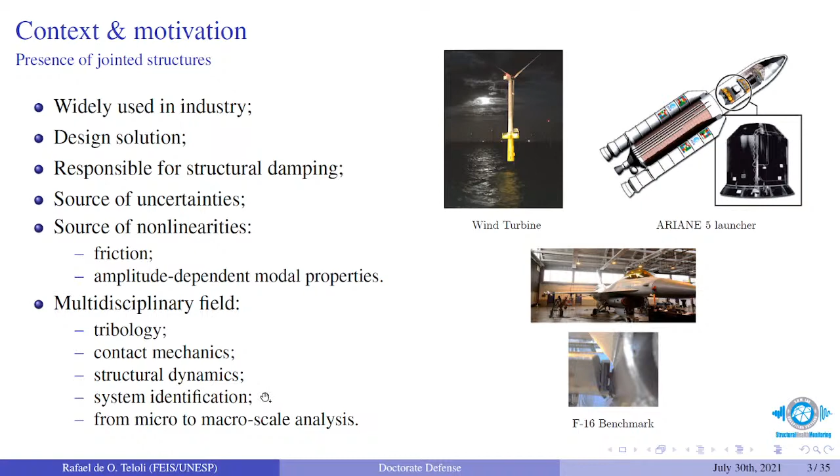The main purpose behind using joints is to connect parts. However, when these parts are subjected to sliding motion, frictional effects may appear. As we increase the amount of slip, the nonlinearities become more prominent, such that the modal properties of these systems are amplitude dependent. Jointed structures are part of a multidisciplinary field, involving aspects from tribology, contact mechanics, structural dynamics, system identification, and analysis from micro to macro scale.

In this work, our interest is in dealing with structures assembled by bolted joints, where we address the nonlinear behavior of such structures. We can divide our problem into four quadrants, ranging from local to global scale of analysis and also from modeling to experimental applications.

Regarding the first quadrant, one may propose the architecture of joints in terms of structure design, interface geometry, roughness of the surface, and whether to use lubricants or not. As I said, our interest is in dealing with the nonlinear behavior of such systems. The experimental setup considered must be as minimally invasive as possible to our system response, in terms of vibration sensing, excitation design, and boundary condition.

From the modeling point of view, there are works in the literature that try to approximate the interfacial physics at the micro scale. Moreover, general purpose finite element software also provides tools for encoding the relative motion between connected parts. Here we have two examples: the Iwan joint model and the node-to-node contact. In both formulations, there is the presence of contact elements based on a phenomenological hysteretic model.

Here, in the last quadrant, the fourth quadrant, we have works that try to encode the main features of these structures based on global aspects of vibration. We deal with isolated nonlinear modes by proposing lumped systems, for instance, to encode the main nonlinearities present in the response of these systems, in terms of nonlinear damping and nonlinear stiffness related to softening effects. In this work, we deal with these three quadrants here, in terms of architecture of joints, design of experimental setups, and modeling joints globally.

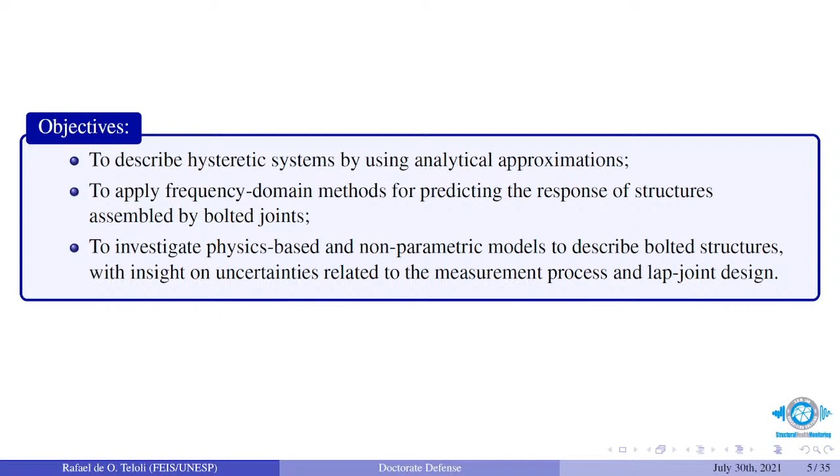The objectives of this work are to describe hysteretic systems using analytical approximations, to apply frequency domain methods for predicting the response of structures assembled by bolted joints, and to investigate physics-based and non-parametric models to describe bolted structures, with insight on uncertainties related to the measuring process and the lap-joint design.

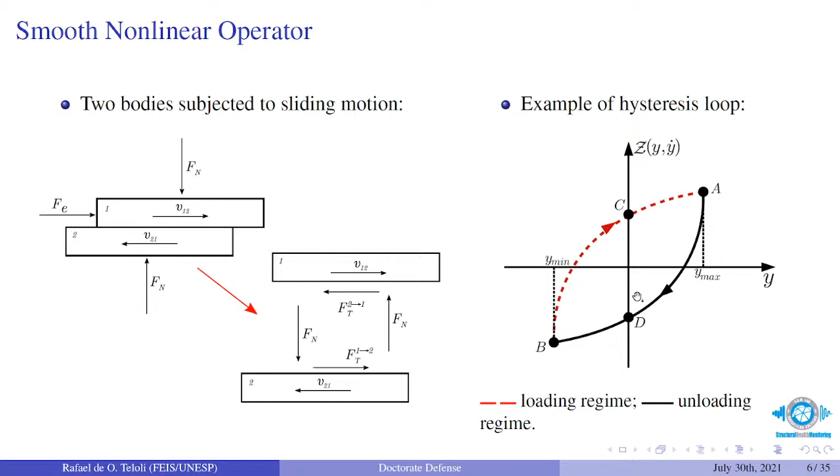Introducing now the frequency domain techniques for hysteresis models, I will start by presenting the smooth nonlinear operator. When subsystems are subjected to sliding motion, we see in the restoring force displacement plane a hysteresis loop. One of the main properties is the possibility of dividing the hysteresis loop into two regimes: the loading regime and the unloading regime. Based on the property that any bounded curve can be well approximated by a polynomial representation, we have proposed two bounding functions following this representation.

Here we have a representation to encode the behavior in the loading regime of motion, and this function to describe the unloading regime. But what is the motivation behind using a smooth nonlinear operator? In general, most phenomenological models available in literature to describe the hysteresis phenomenon are non-smooth. Due to this reason, it is not possible to approximate the solution of these systems using a sum of series, such as the Volterra series.

Here I have an example, the Bouc-Wen model. We have the inertial terms, the damping, stiffness, and the hysteretic restoring force that depends directly on its time derivative, such that alpha, beta, gamma, delta, and upsilon are the Bouc-Wen parameters. Note the presence of the modular function. As said, we can divide the hysteresis loop into two regimes, and especially for the Bouc-Wen model, we can divide it into four different equations.

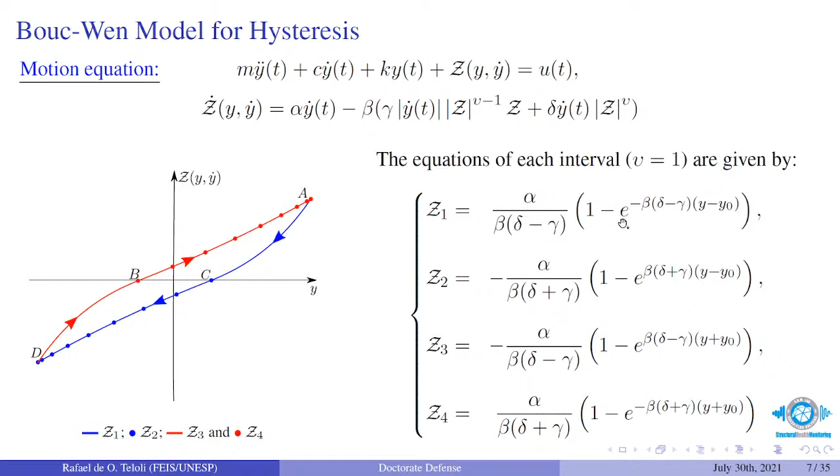When we assume this value equal to 1, we can rewrite the restoring force of the Bouc-Wen model following these four relations, in which Z1 and Z2 are responsible for encoding the unloading regime of motion, and Z3 and Z4 for encoding the loading one. Note that the expressions of the restoring force paths are given based on this exponential term. We must substitute this term in order to provide an explicit relation of the restoring force in terms of the displacement.

We have proposed to approximate this relation using the Taylor series as a smoothing procedure, such that we can now represent these restoring force paths based on a polynomial approximation. Based on these equations, we can now propose an equivalent nonlinear model to represent the Bouc-Wen. Here we have our nonlinear operator, given according to these bounding functions. We will have one function to describe the loading regime of motion and another to describe the unloading regime.

The transition between these two functions is given according to the sign of the time derivative of our excitation input u. Note that we have the lambda coefficients of our polynomial form, and due to the presence of symmetry in the hysteresis loop of the Bouc-Wen model, the absolute values of these coefficients are equal. So lambda 0 here is equal in absolute value with this lambda 0 here. Due to this reason, we can represent these coefficients as an explicit function of the Bouc-Wen parameters following this relation, in which we now have expressions for the coefficients lambda 0, 1, 2, and 3. These parameters, in addition to the Bouc-Wen parameters, are given as a function of the maximum displacement in the hysteretic restoring force y, and also as a function of the threshold displacement y0 that corresponds to the opening of the hysteresis loop.

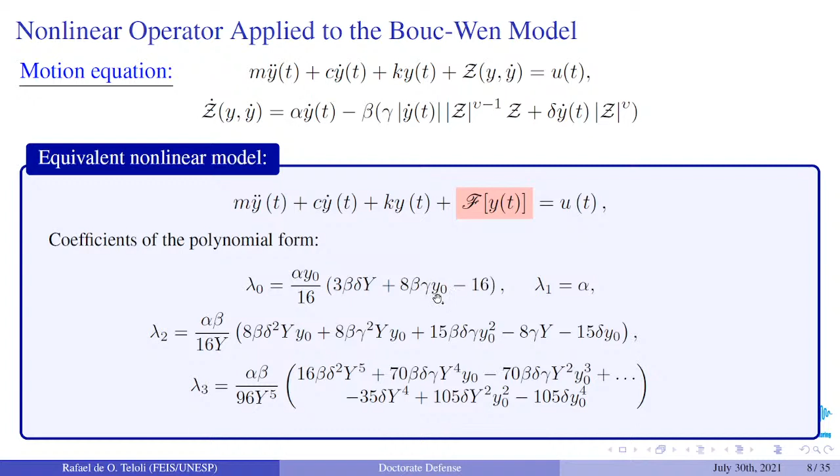We can combine these bounding functions into a single expression following this relation, in which this parameter is given according to the transition with regard to this sign, and we will see this parameter u0 as an additional input to our problem, given as a function of the parameter lambda 0 and the sign of the time derivative of our excitation force. Since our interest is in smoothing the hysteretic restoring force, we will approximate this additional input using the Fourier series approach, represented here in the exponential form.

Now that we have a smooth formulation for representing the Bouc-Wen model, we can introduce the Volterra series that we will use to approximate the solution of our system. So here, one of the main

advantages in dealing with the Volterra series lies in the possibility of dividing the nonlinear output of a system into linear and nonlinear contributions. It is important to point out that the linear contribution corresponds to the impulse response function for linear systems.

Each of these contributions can be computed based on this relation here, in which we have the convolution between the Volterra kernels and also the multiple inputs considered in your problem.

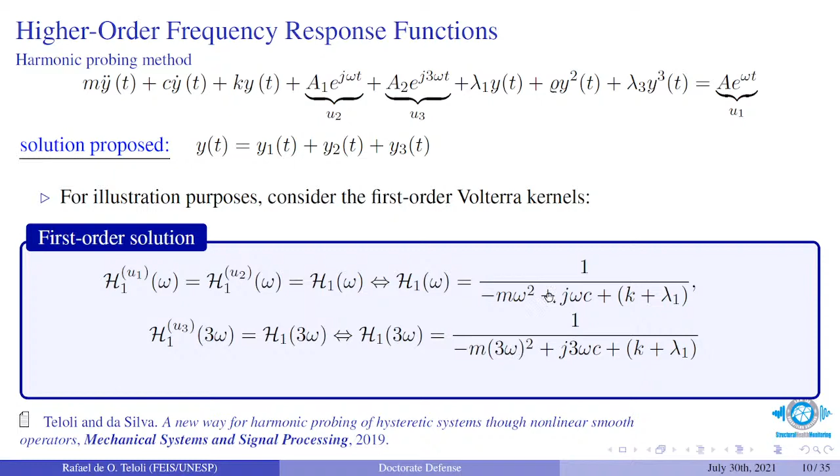here. Now we can predict the response of our equivalent system by using the Volterra model. We will consider here the Bouc-Wen oscillator with these model parameters that were obtained from this reference here. The solution of our system was obtained based on the numerical integration by using the 4th order Runge-Kutta method.

Here we have the direct comparison between the response from the Bouc-Wen oscillator and the Volterra model in red. Note that here the Volterra model could predict with good agreement the response from our Bouc-Wen oscillator.

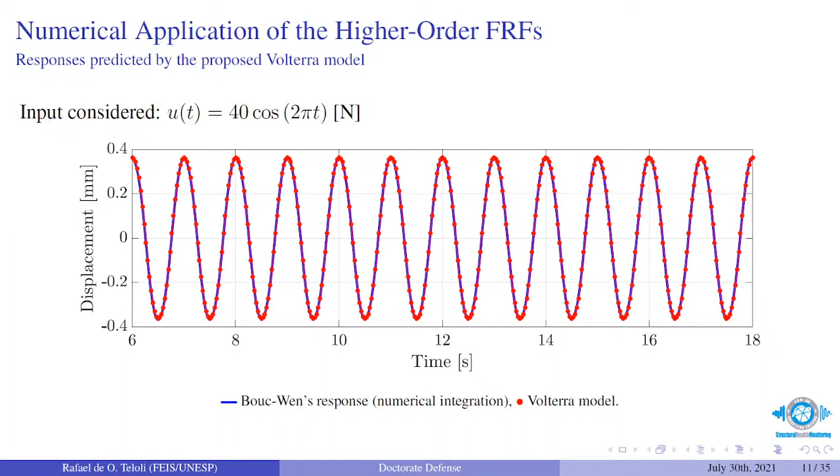Another way that we have to approximate the solution of the Bouc-Wen model is based on the harmonic balance method.

In this framework, we will assume that the nonlinear response of our system can be projected by following the Fourier series approximation following this relation here. Moreover, the restoring force can also be formulated based on the Fourier series following this expression here.

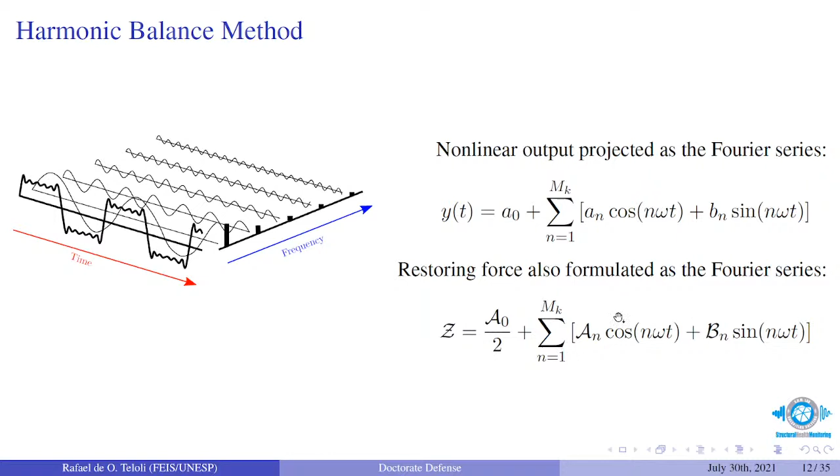Substituting both terms in our motion equation and assuming that we have a harmonic input, we will find this system of equations here.

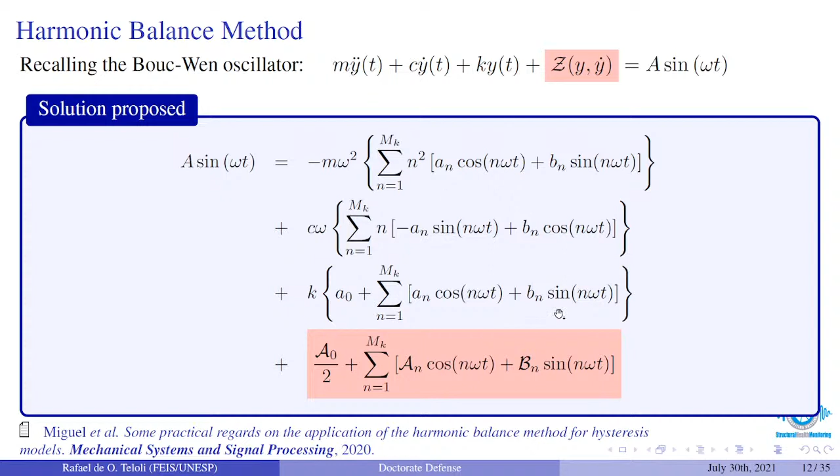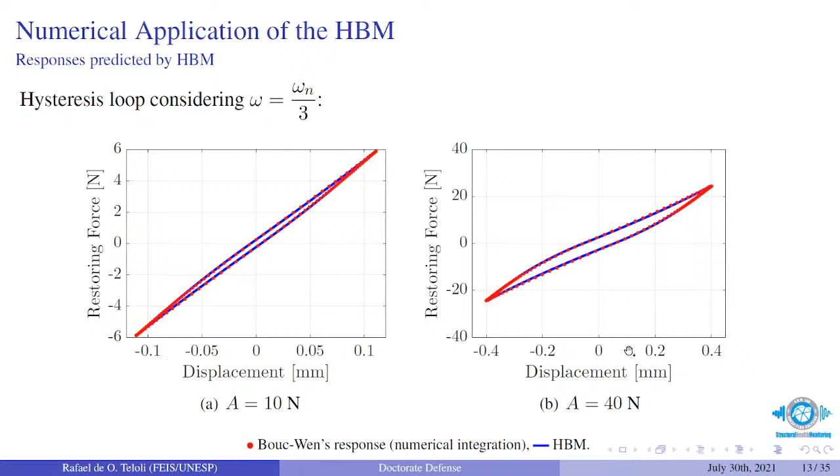By assuming 3 terms in the harmonic balance approximation, here we have this hysteresis loop predicted by our analytical solution around 1/3 of the resonance frequency for low and high excitation amplitudes. Here we have the response in the time domain that highlights the presence of harmonic distortions in our response.

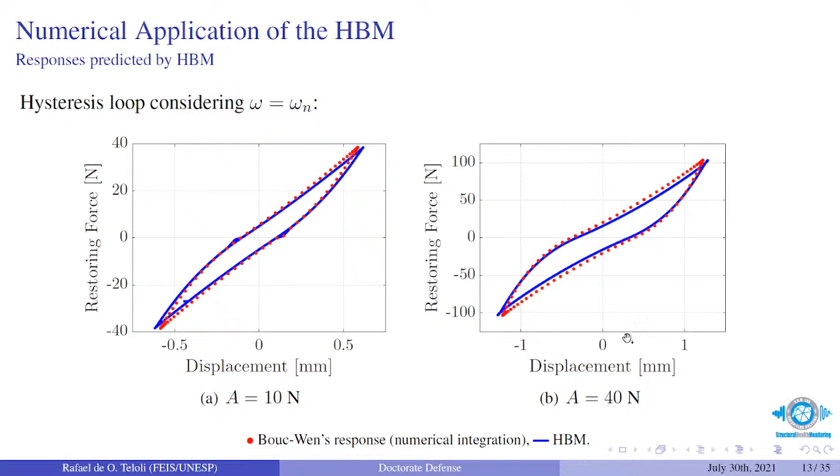And here we are considering this hysteresis loop predicted when we have the excitation frequency at our resonance. So here for low excitation amplitude, and here for high excitation amplitudes. Also, we have the time response, in which we can see that the harmonic balance framework could predict the behavior of the Bouc-Wen oscillator better than the Volterra model.

As final remarks related to this section, the smooth procedure proposed here can be an interesting alternative solution to deal with hysteretic systems. With regard to the Volterra series, this was the first application exploring the use of Volterra series harmonic probing algorithm and also systems with hysteresis.

However, we still have convergence problems, but even so, the higher order FRFs provide a good framework for parameter estimation. We will see this topic in more detail in the next section.

With regard to the harmonic balance method, it performs better than the Volterra model, especially for high amplitude levels and in the vicinity of the resonance frequency. We still have convergence problems, but this approximation paves the way to the possibility of analyzing nonlinear modes in systems with hysteresis. Further details on this section here can be found in these both papers.

Introducing now the use of the high order FRFs. In this section, we will deal with an experimental application.

In this case, we have some ingredients. The first one is that our experimental test bench presents softening effects in the vicinity of the resonance frequency. Moreover, since our measurements are performed during different days on the same week, we have also data variability. And due to the presence of a joint connection, we have the presence of the hysteretic restoring force actuating on our system.

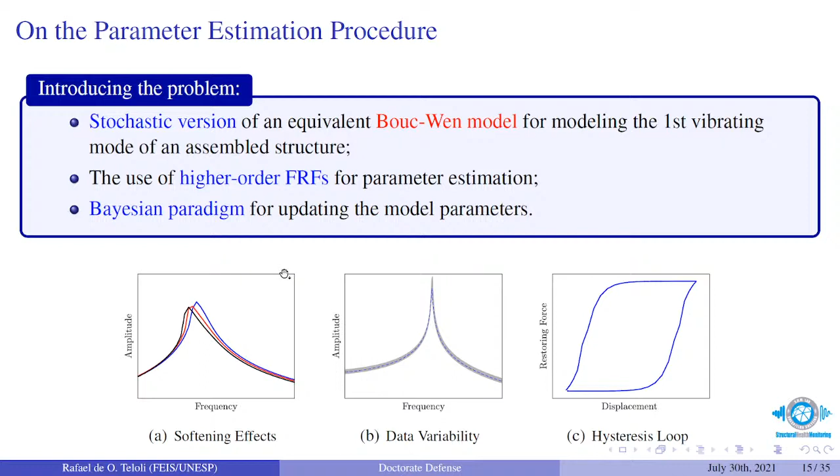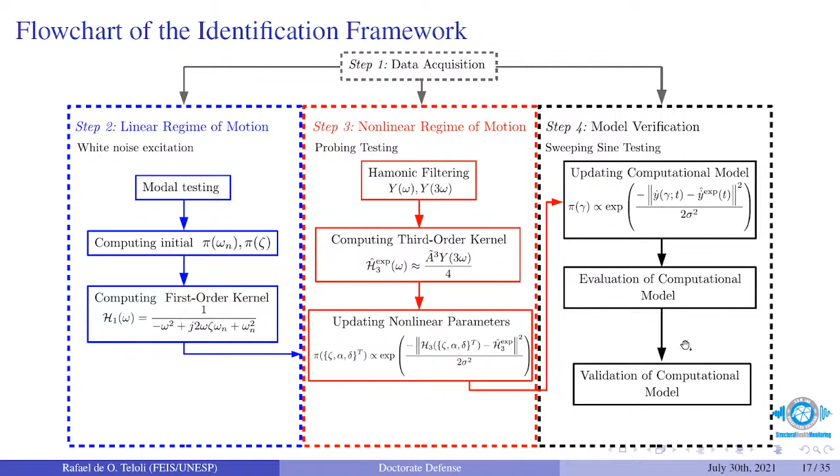We will then evaluate our computational model and validate it by comparing the hysteresis loop predicted by our computational model with that from our experimental measurements.

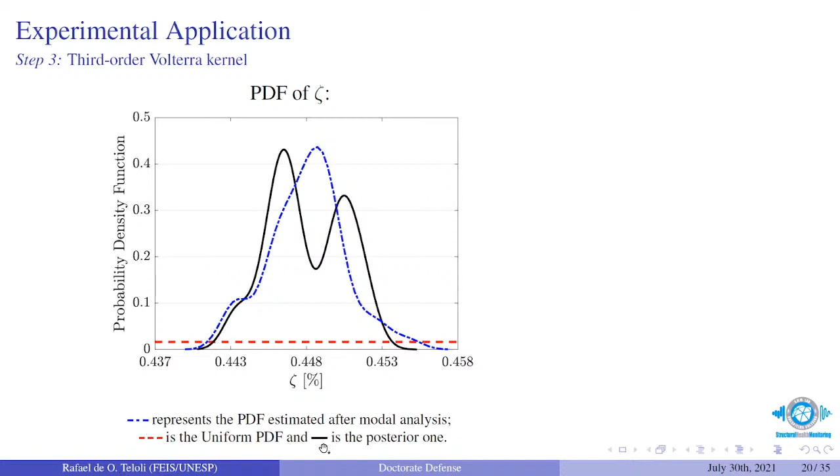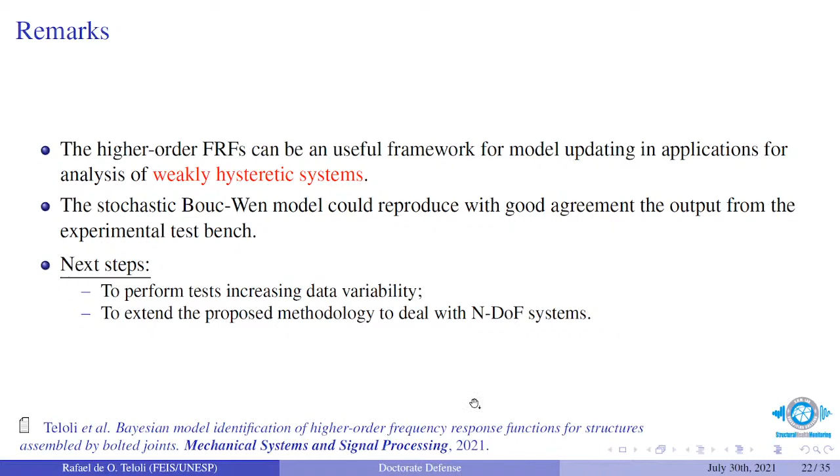Let's introduce now the experimental testing of dynamically excited jointed structures. We will propose a new benchmark, so-called Orion beam.

In general, it is difficult to achieve damping and stiffness at the same time, since enhancing damping requires low contact pressures. The contact pressure is directly related to the tightening torque applied on bolts. Thus, if you reduce it, the stiffness will also be degraded.

To avoid this problem, we have proposed a structural design in which bolts play different structural functions: bolts playing static functions to ensure structural stiffness, and bolts to perform damping functions to increase the frictional dissipation. From that, we expect to have amplitude attenuation without significant changes to our nominal frequency. To approximate the response from our experimental setup, we have proposed a Duffing-van der Pol model.

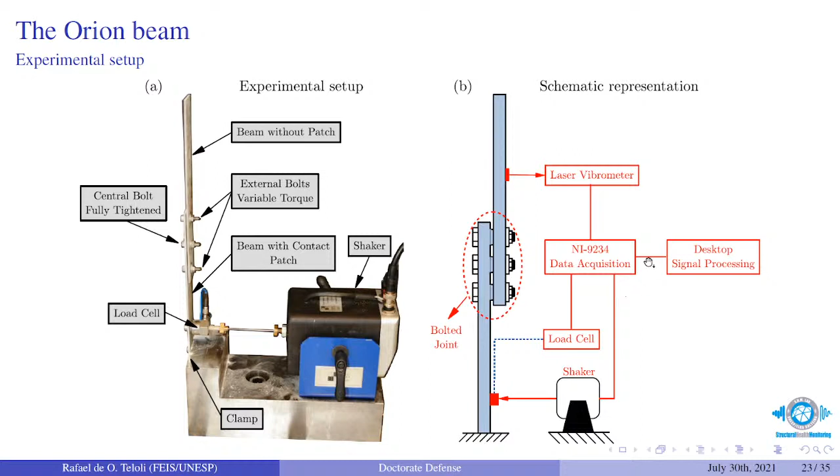And here we can see the values of tightening torques applied. The central bolt will always hold a tightening torque of 80 cNm to ensure the structural stiffness of our system, whereas the external bolts will vary the tightening torques into 80, 30, 20, and 10 cNm. Note that here we have the presence of contact patches to reduce the contact area and minimize uncertainties related to the contact surface.

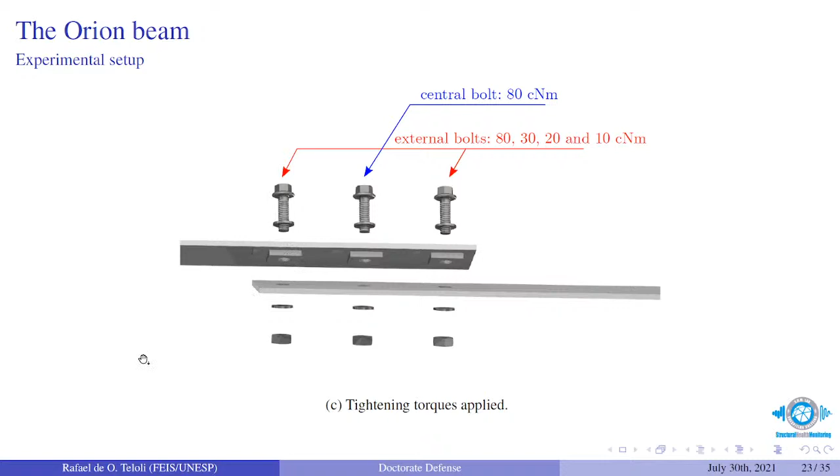The main idea behind it is to generate a control signal to send to our shaker. So we will send a voltage to our shaker. The shaker will excite our structure. Then we will measure the force applied by using a load cell. Then we will compare the force measured by our load cell with the desired force in our set point. Then we will perform the amplitude correction and run this feedback controller until the convergence of the force value.

Let's now introduce some dynamic response from the Orion beam. Here, the structure was subjected to white noise excitation, considering a monolithic condition. In the monolithic condition, we consider that the contact patches will be glued. Here we have the frequency response curve, and here we have an illustration of the modes.

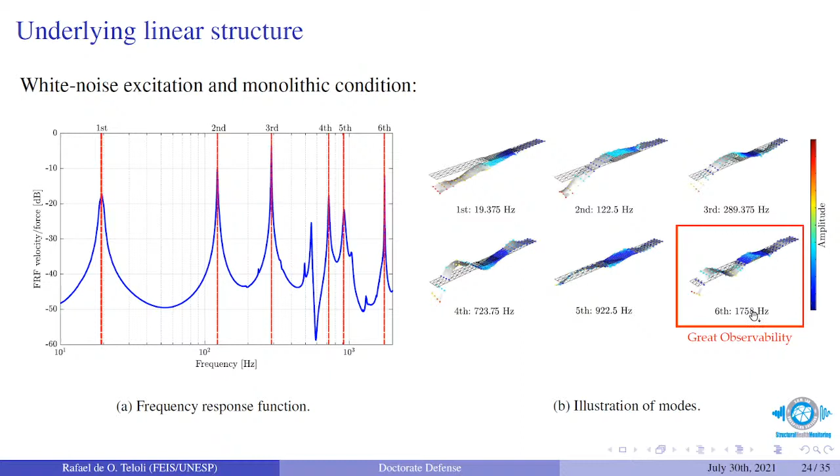Considering 195 sensing points, to evaluate the design choice performed in our work, we are interested in the vibrating mode that promotes pronounced deformation, especially around the lap joint. So then we have selected the 6th bending mode due to the observability purpose.

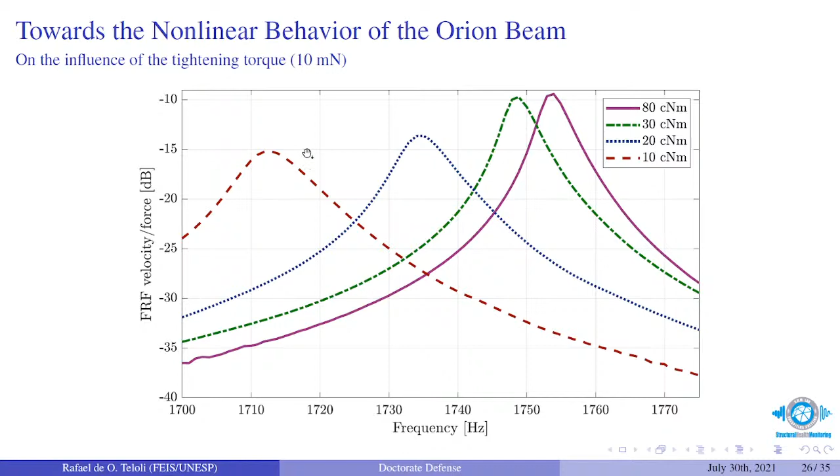Here we can see that as we decrease the value of torque, the stress caused by the tightening torque applied changes the behavior of our structure in frequency. Here you can see a shift in frequency and also in amplitude. We have more amplitude attenuated in this condition than in this one.

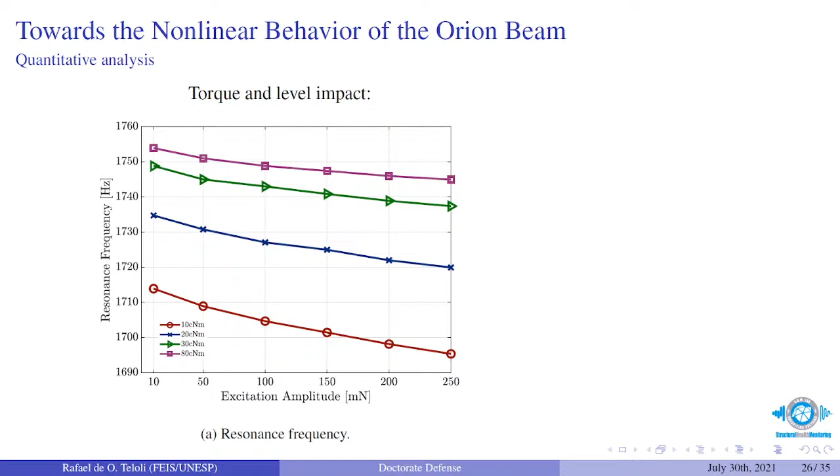We can now perform a quantitative analysis based on these figures. Here we have the evolution of the resonance frequency as we increase the excitation amplitude. Note that here we can see the resonance frequency decaying due to the softening stiffness. The softening occurs due to slip, due to the increase of the amount of slip that occurs in the contact patches.

From these curves here, we can perform some remarks. The first one, with regard to the bandwidth evolution, it depends on the energy dissipation by the frictional effects that occur on the contact patches and also due to the presence of the softening stiffness.

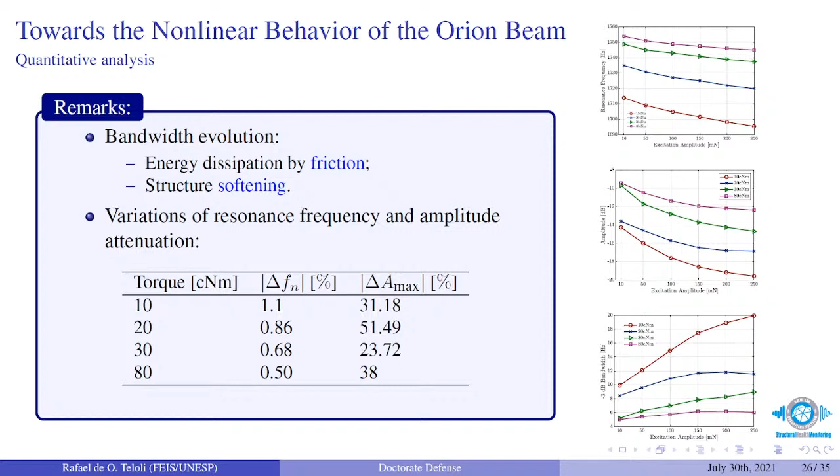With regard to our resonance frequency and also our amplitude attenuation, here we have compared the first value of frequency and the amplitude attenuated, considering low excitation amplitudes, with the last one considering the highest level of excitation amplitude. Note that variations in terms of our resonance frequency are low, around 1%. However, we have a greater variation here in the attenuated amplitude.

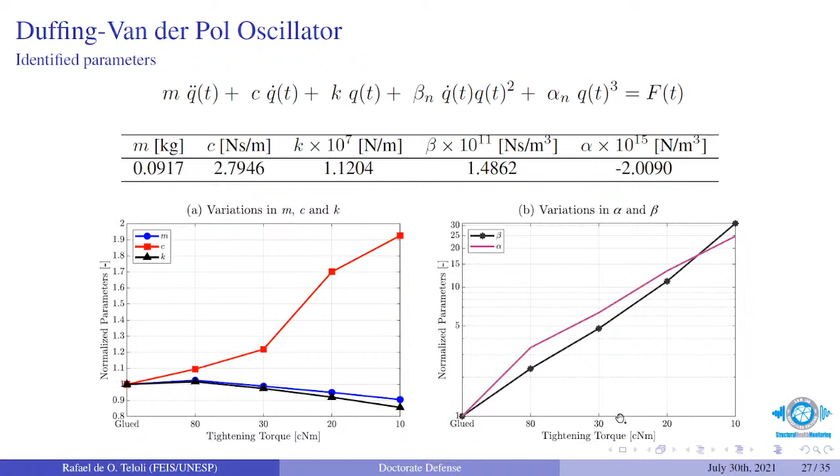As final remarks related to this section, the contact patches minimize the dynamic clearance and provide a contact pressure slightly sensitive to shape imperfections. So we have ensured interesting measurement-to-measurement repeatability. We proposed a design in which it is possible to benefit from amplitude attenuation without significant losses in the contact stiffness. Moreover, we have proposed the use of the Duffing van der Pol method, which performs well.

As next steps, the lap joint configuration suggests further investigations into new control techniques in jointed structures for amplitude attenuation based on the applied bolt preload.

Let's introduce now the use of a non-parametric approach for predicting the theoretical behavior of jointed structures. Just introducing the problem, in some applications we demand less expensive computational cost, for instance, for decision making or to verify the design choices. In this context, black box approaches that do not depend directly on the physical parameters are a good choice. Then, in this section, we have proposed a machine learning Gaussian process regression model with the NARX framework to emulate

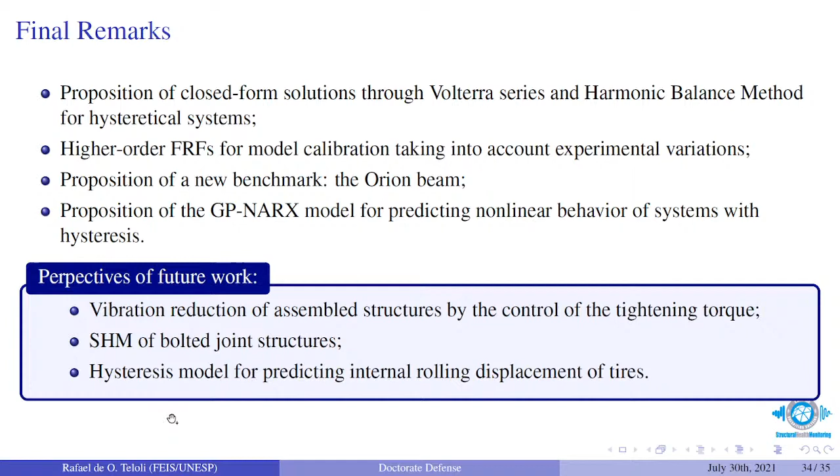Based on the results explored in this doctorate defense, the perspectives of future works are to propose vibration reduction based on assembled structures by using control of the tightening torque applied on the bolts, to explore especially the GPNARX model for SHM applications of bolted structures, and then, based on the non-smooth operator and also on the Bouc-Wen model, to propose new approximations for predicting the internal rolling displacement of tires.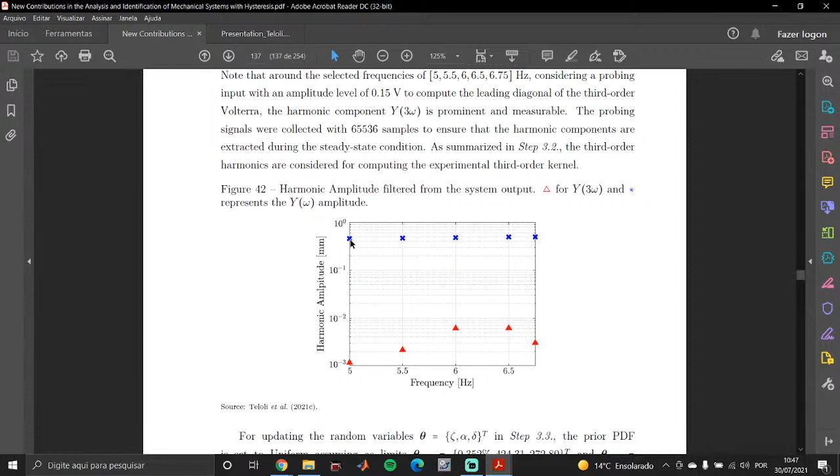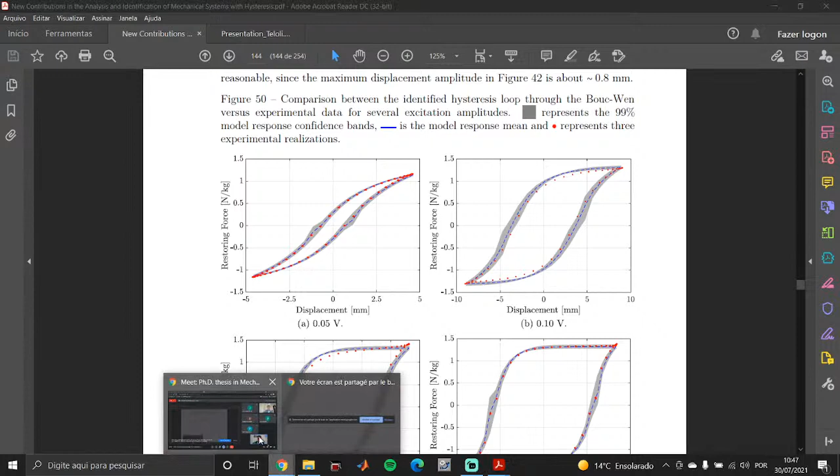So here I have a comparison between the harmonic amplitudes. Here we have the first order harmonic amplitude, and here in red we have the third order harmonic amplitude. If you look at this value here, they are lower than the maximum amplitude found even in this relation. So here we are at almost 3 millimeters as maximum displacement amplitude, and there we are around 1 millimeter. Since the amplitude dependence of our nonlinear system will give the opening or not of our hysteresis loop, we have assumed that at those conditions the hysteresis loop is almost closed. I don't know if that was clear.

That answered my question. Let me see if my understanding is correct: in looking at the Bouc-Wen model, you have a linear viscous damping coefficient zeta, and then the nonlinear terms are the cubic spring term and the other term you've got there. So it's okay that you're treating it for this system the way you do.

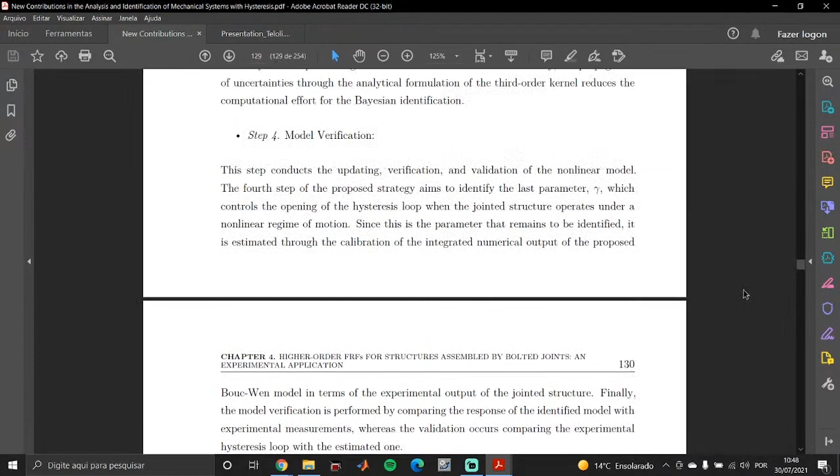Okay, since you've got your thesis open, let me ask one quick question before we jump back to the presentation. Could you go back to figures 41 and 40? You scrolled by those a few moments ago. The reason I want to look at these two figures is because I thought they were for the same system. Here's one of them, okay.

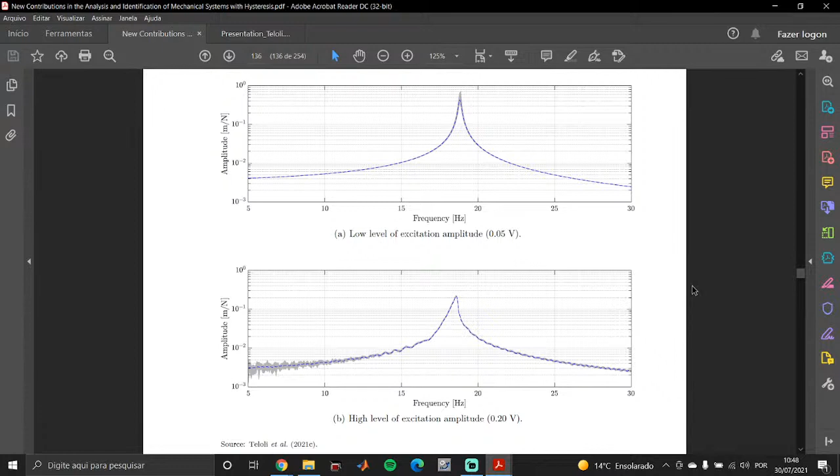So this is showing a softening behavior, right? Yes, figure 40b is softening behavior. But if you go to figure 41 for the same system, you're showing a stiffening behavior. Yeah, okay, right there. So I think I might have missed this in the text. Can you explain why 40b shows softening and 41b shows stiffening?

Yes, of course. So here we have considered step sine tests in this figure. This figure here is equal to this one, the black one. So we are seeing the degradation of our FRF due to the nonlinearity. It looks like hardening behavior, but if we compare with the linear case, we can see that the stiffness, the resonance frequency, is in fact decaying. So it is the same figure as the black curve here.

Okay, that makes sense. Thank you for explaining that.

You're welcome. So one of the general themes in the questions I'll share with you later about comments on your thesis is I was hoping for more details on the experiments. I've got a whole list of them, but maybe some of the more important ones to ask: how did you enforce the bolt torques that you went with? Because you had very specific bolt torques of 20 centinewton-meters, 80 centinewton-meters. How did you prescribe those bolt torques?

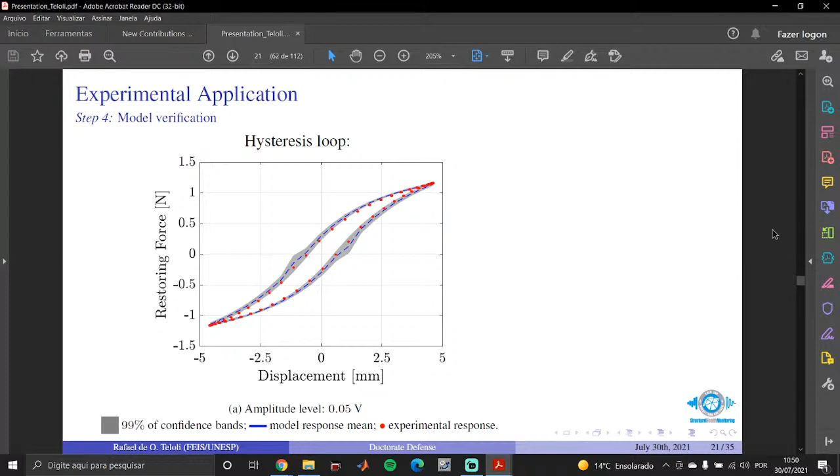So we have used a torque wrench. At each experimental run, I have checked the value of torque applied on these bolts using a torque wrench. In both applications, even here in the Orion beam and also in the last figure that I have shown, this one. So I haven't used an instrument to measure this in real time. I haven't considered this. I have only measured this after each experimental run.

Okay, so the reason why I'm asking this question is torque wrenches are notoriously unreliable. We did a study looking at the strain in bolts after torquing them up to a prescribed level, and generally for us we typically tighten things up to like 20 newton meters, so a lot higher. But nonetheless we found that the average strain in the bolt was like 40% of what we were expecting it to be, and the standard deviation was almost like 35% of nominal value. So the torque wrench introduced a lot of experimental error for us that we later had to correct.

I'm curious if you tried to account for this or understand this, because I see that you've got some plots of variability. You've got one really good figure looking at the variability from assembly to assembly when you disassemble them and put it back together, and this is the variability from measurement to measurement where you just loosen the bolts and retighten them again. So I'm wondering if you could comment on that at all.

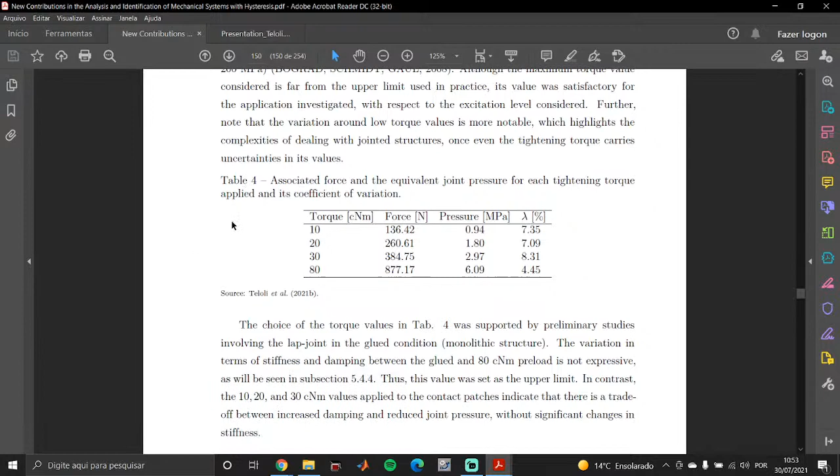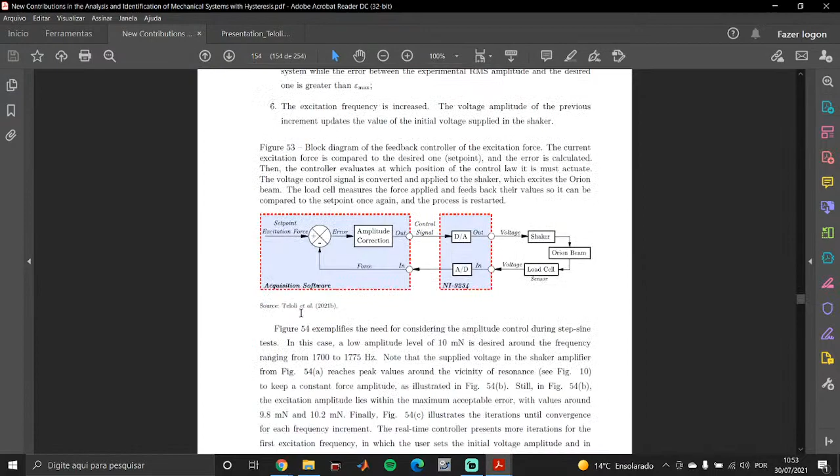The next question I have is regarding your conclusions from studying the Orion beam. This is a quote from your conclusions: it is possible to improve energy dissipation in bolted systems without compromising their integrity just by tuning the tightening torque properly. As a tribologist, I have a lot of concerns with that statement, because as you lower the tightening torque, the added dissipation in your system is coming from interfacial friction. And that interfacial friction manifests itself as fretting, fretting fatigue, fretting wear, which means that if you're going to increase the damping by lowering the torque on the bolts, you are going to dramatically shorten the life of the beam because you're dramatically increasing the fretting fatigue of the beam. I was wondering if you could comment on that, or maybe think about how you might want to reword that statement, because your statement says you can do this without compromising the integrity of your system. But as a tribologist, to me, you have significantly compromised the integrity of your system.

Oh, in fact, thank you for this comment.

I think I missed the problems related to this when I considered the reduction of the tightening torque. It was related to keeping the structural stiffness. Maybe I wrote this in a wrong way, but the idea was to use the main factors from the Orion beam, to try to keep the resonance frequency close to the value of when the system behaves linearly. This was the idea.

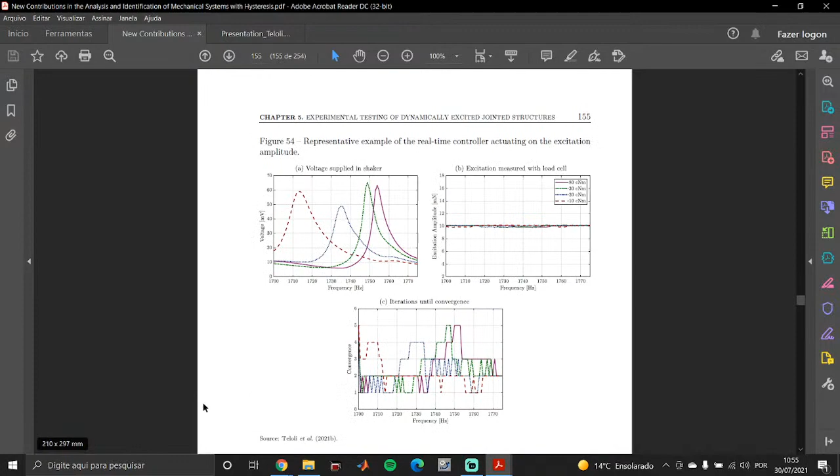But yes, you're right. I think we saw in some results that even with these values of torque, we start to see black traces on our patches due to the friction that is acting in our contact patches. I think I should consider this and maybe rewrite the conclusions related to this phrase.

Yeah, it's a fine distinction, but I think if you stick with stiffness, that helps address it. I'm curious if you've looked at long-term effects, like now that you're seeing corrosive wear in your interface - that black speckle is aluminum oxide, from having heated it up and had fretting occur there. Going back and retesting the system, have you seen that from the start of your experimental campaign to the end the linear frequency changed at all?

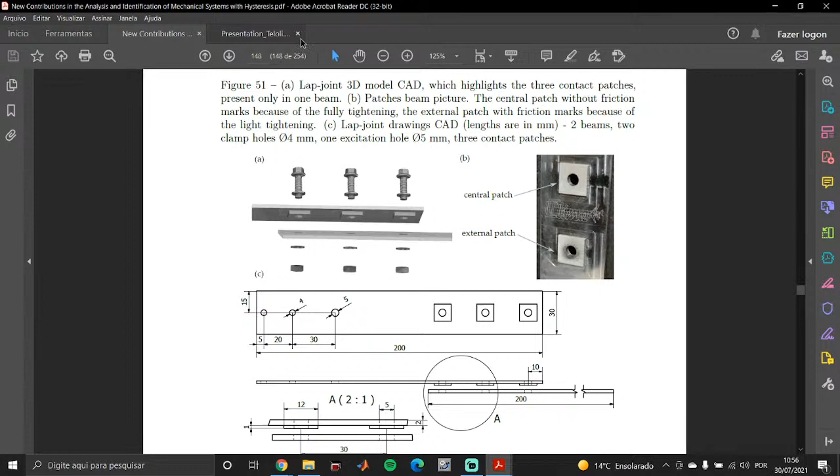In fact, yes. I have tested different beams and performed a lot of tests, and in the results I've measured, I didn't see any changes with regard to the resonance frequencies. Yes, I have a variation due to each time that I assemble, I can see the variation in the results, but the variation in frequencies is not significant.

So we will see the 6th bending mode around this frequency interval here. But this will be, of course, a question for future work. I intend to work more on this benchmark to then investigate the micro-scale effects after the experimental runs.

This is, in fact, a good idea as a next step. Yeah, that's something we've tried to adopt as our own internal best practice - measuring the linear frequency of the system before an experimental campaign and afterwards to see how much damage our system incurred, especially when you're doing shaker excitation, because shaker excitation does lead to fretting, and fretting can occur in just a couple hours of excitation.

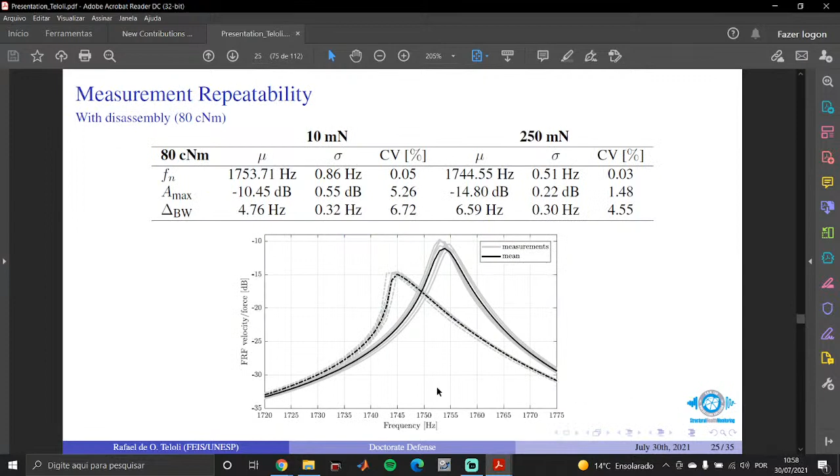So let's go back to that variability plot that you had. I think I don't have too many more questions - the rest I'll give to you by emailed comments. But the one where you showed the variability across disassemblies.

That's here. Okay, so for subplot A, did you do anything to control for the alignment of your structure, or did you just hand align it? In fact, we have an assembly protocol that we followed to try to keep the same structural condition.

Because if after assembly and disassembly we get new structural conditions - in this case we tried to keep the repeatability of our measurements by using a protocol, which I've explained a bit more in the thesis. We always followed an assembly protocol starting with the central bolt to ensure the alignment of the beams, and then after that central bolt we put the external bolts on the structure.

Yeah, the reason I'm asking about this is that, say these are the two sides of your interface, and if you're just bolting it together, there's enough slop in the bolts that instead of it being perfectly aligned - I'll exaggerate - you'll get something that looks like this one time and like this another time. So you have some angular misalignment between the two interfaces, and that's my hypothesis for what's giving all that variation in subplot A.

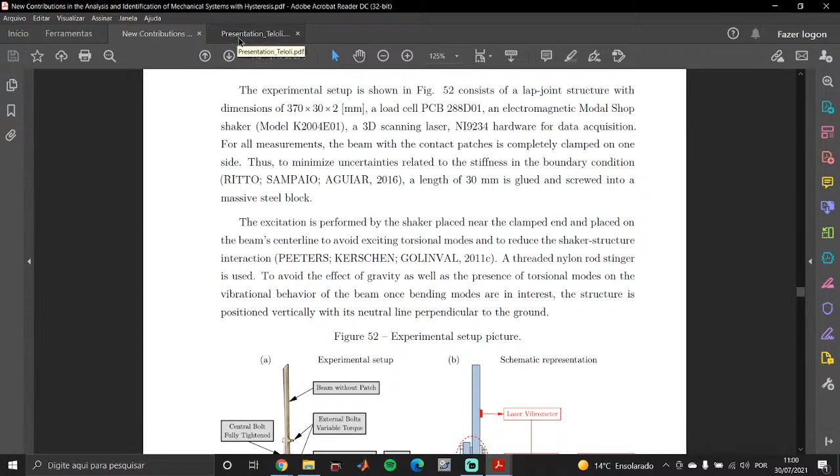If you look at the papers where the S4 beam is developed by Rob Kuether's group, it's from one of the NOMAD papers, maybe IMAC 2019 or 2020, one of the Rob Kuether papers. They had a little 3D printed alignment guide. If you can't find the details, you're welcome to get in touch with me. My students are doing something similar for a different structure that Gael actually helped me design, or I designed with Gael. So Gael and I need to talk about that more in a little bit.

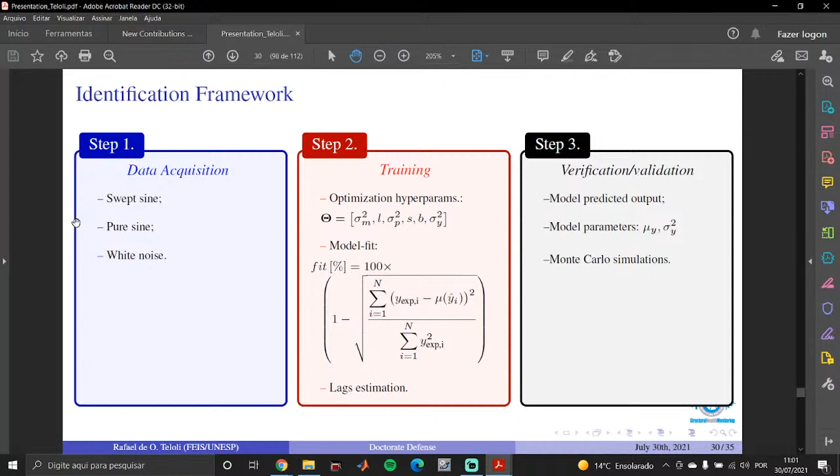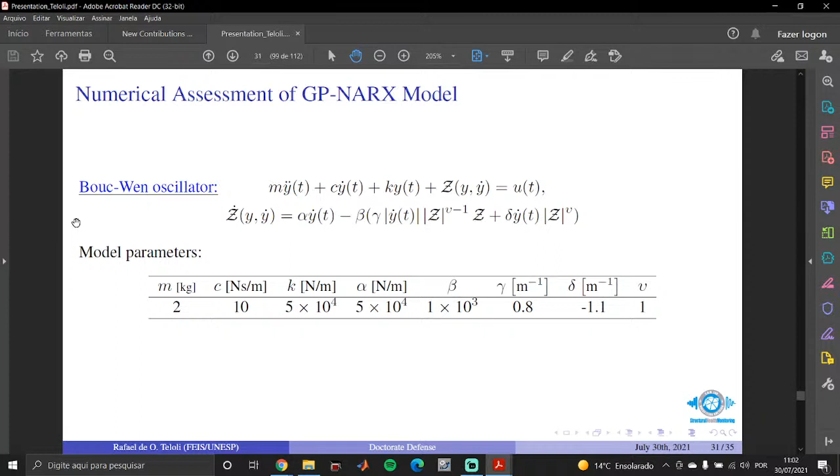Okay, very last question. For the GP NARX model, I have the same type of questions as I did for your identification method in chapter 4 about how you're handling nonlinearities, because it seems like the GP NARX model is trained on one amplitude level. When you think about applying this to structural health monitoring, like a bridge or some other application, the amplitude or excitation level is not going to be constant, it's going to vary quite dramatically throughout use. In chapter 5, you showed these amplitude dependent nonlinearities, the stiffness and damping are highly amplitude dependent. As you look forward to your future work, how do you plan on accounting for this amplitude dependency that isn't really reflected here with the specific form of the Bouc-Wen model you're working with?

Yes, so in fact here, to increase the predictive capability of our model, we have considered two excitation amplitudes. This was a benchmark, the Bouc-Wen, a challenging benchmark with a greater degree of difficulty to approximate the nonlinearity of the model. The idea of using this value of excitation force, the highest one, was to include the nonlinearities in our GP NARX model. In this structure, the hysteresis loop and the displacements in this dynamic system are not as pronounced, the nonlinear behavior is not so pronounced as in the Bouc-Wen case. But with this numerical assessment, we think the GP NARX could reproduce well, even in a very nonlinear case, due to the framework of the NARX model. We have seen in literature that the NARX model can reproduce complex nonlinearities well, but we still have problems with hysteresis due to the dependency on nonlinear stiffness. Here in this case, with the GP NARX, we have seen that it is possible to predict the response. It was not possible to predict the response of the Bouc-Wen model using the simple NARX model, but with the GP NARX we could reproduce the response of the system. I think the GP NARX could be a very interesting tool because we can deal with more complex systems than by using, for instance, the Volterra series or even the harmonic balance method.

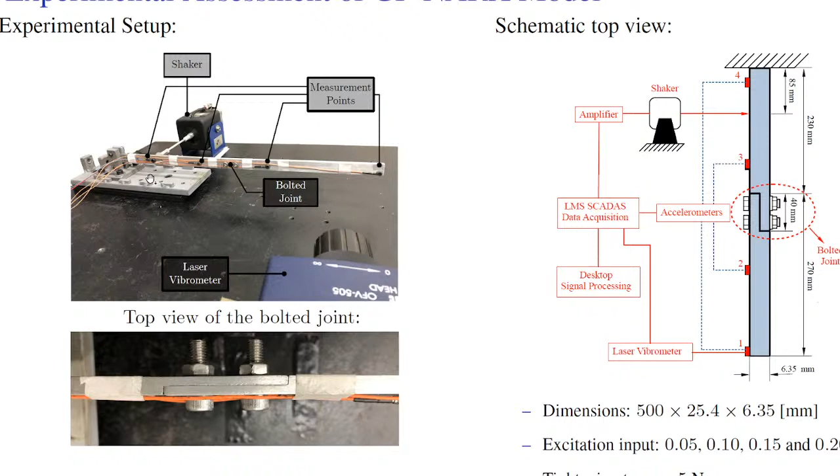In this case, at the beginning, I had some problems with the alignment of this structure. So I performed some measurements of the distance from this side of the beam relative to our table to keep the alignment of the structure. Then I used some supports to keep the alignment, and applied the tightening torque on these bolts to ensure the clamping. Unfortunately, in this case, I have not measured the velocity close to the clamped end. In the other beam we measured, we can state that we have a clamped end, but in this case we have not measured the velocity around this connection. So I'm not sure if I can say that in this case we have a clamped condition, maybe not exactly a clamped condition.

Historically we've struggled with getting truly clamped boundary conditions, which is why we never do them in my group. You might be interested - Christoph Schwingshackl has a really good IMAC paper from maybe 2014 or so, where he's looking at different ways to create a clamped boundary condition and the influence of different experimental setups on achieving it. If you can't find the paper, send me an email, I'll give it to you - I've got it in my saved library, just for future edification.

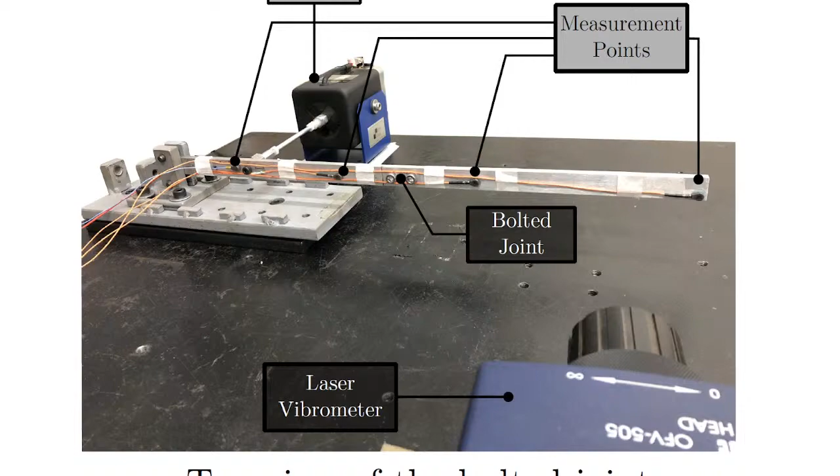Anyways, thank you for putting up with all my questions. As I said, I think you did a great job, and a lot of my comments are somewhat nitpicky, but a couple more in-depth ones that you answered very well. So I will turn the floor over to whoever is next.

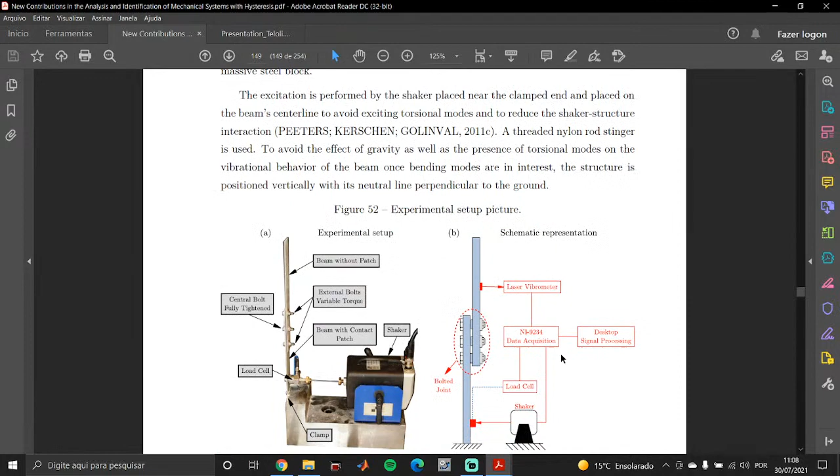There are very minor suggestions regarding your text, nothing technical, and I just have a couple of questions to put to you today. I'll go directly to the experimental analysis in chapter 4, particularly figure 39. We could go back again to that figure - I'll just share my screen. This was addressed previously by Professor Brake's questions, but I'd like to go back to that a little bit more.

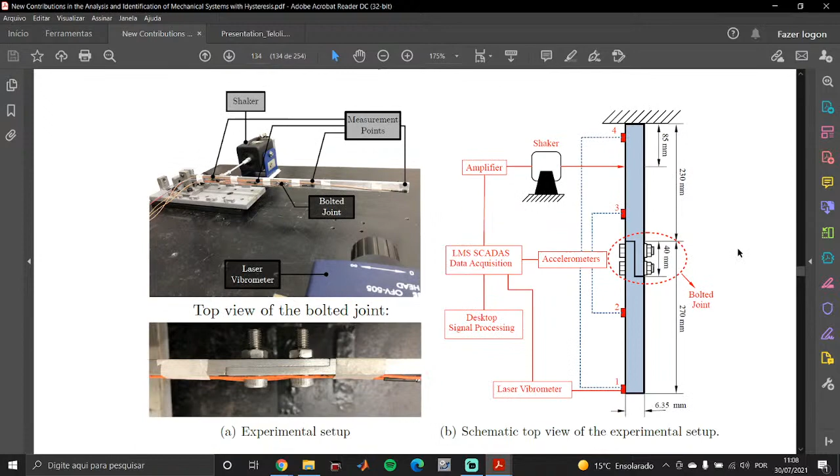Yes, right there. If I understand, right after the figure in your text, you say that figure 40A illustrates the calculated receptance. If I understand correctly, in your experimental apparatus in figure 39, you're not using a force transducer to measure the shaker force applied to the beam, correct? Is there any particular reason why you're not using a force transducer in this experiment for measuring the applied force from the shaker?

Yes, in fact we have measured the load force, but we saw that, especially considering swept sine tests and also stepped sine tests, the signal applied was not constant - the signal applied was not constant in the load cell. Due to this reason, we have considered instead the value of the voltage supplied on our shaker amplifier, and then we have identified a constant to transform the voltage into a force value.

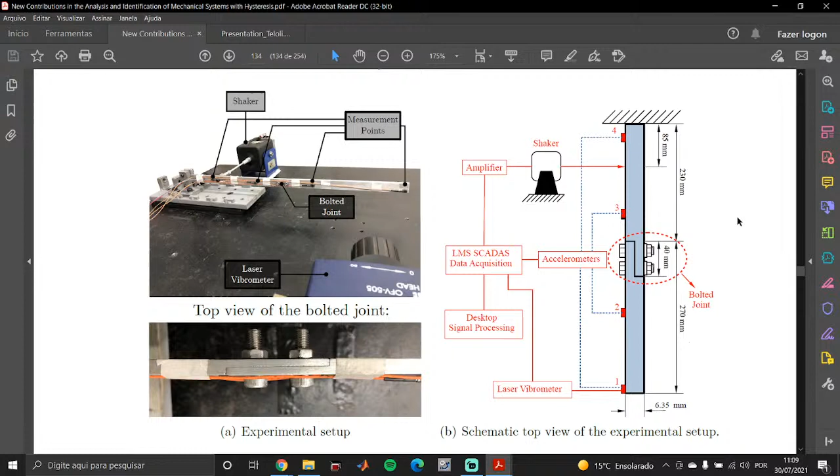Oh okay, that also answers my following question - since you are not measuring the force, but in figure 40 you're showing the receptance in meters per Newton, I just would like to ask what did you use for your force reference? You're using the voltage signal from your signal generator, right? Yes, the voltage signal times the constant to transform the voltage into a force value.

Okay, so when you say that you ran some previous tests with the force transducer but the force is not constant along the frequency axis, what have you observed? Have you observed some drop-off because of some resonances or some not negligible shaker-structure interaction in your test? What have you observed in more detail? In fact, it was the force drop-off phenomenon.

Yes, so even putting your shaker in a place that is closer to your boundary condition, which for testing cantilever beams, as long as they're not too flexible, wouldn't be the most suitable position for the shaker - you have observed some drop-off phenomenon, right? Yes. Shaker testing has those little features sometimes that aren't very useful, but okay, I understand your answer, and I'm pretty much satisfied.

The reason why we have considered the feedback controller in the application involving the Orion beam was especially to minimize the effects related to the force drop-off, since we were testing the stepped sine. Okay, yeah - another comment that I will forward to you in my PDF goes along the same line as Professor Brake was mentioning.

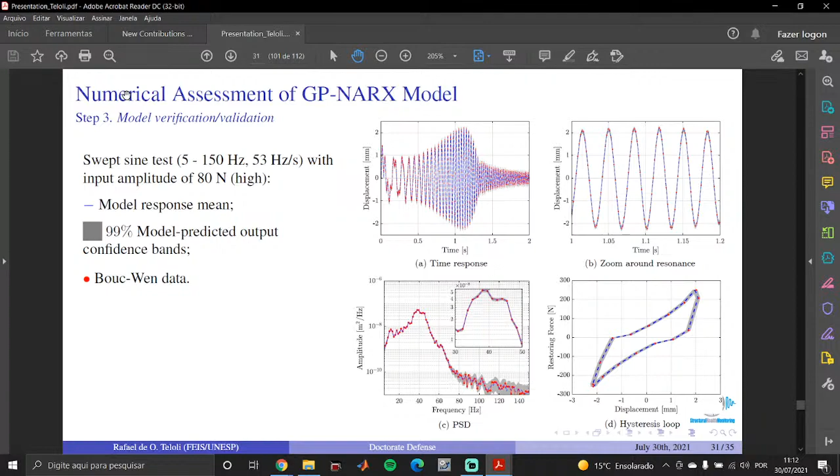Specifically on the boundary conditions, if you look at your testing, let's use figure 39 again, keep that slide regarding the assembly and disassembly. On your beam, you actually have three boundary conditions you could consider: the connections on your joint with the two or three bolts, depending on which structure you're using, the connection with your shaker that could also be understood as a boundary condition, and the clamping. In the process of assembling and disassembling, did you also disassemble one of the beams from the clamping conditions, from the cantilever clamping, or did you just leave it there?

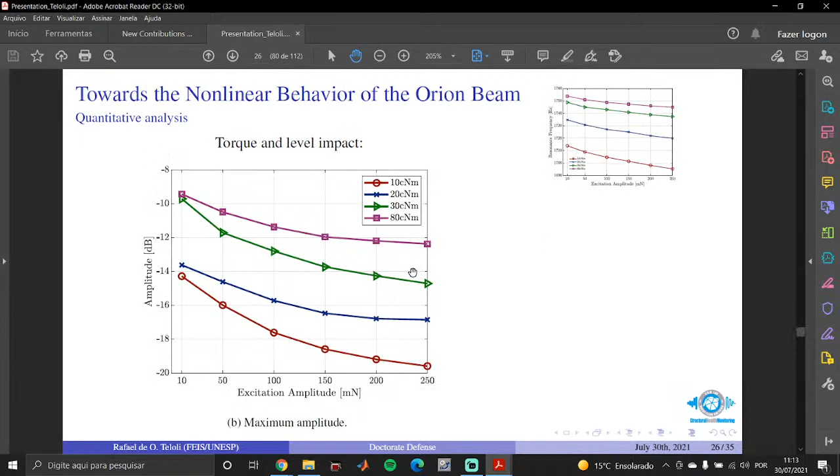No, just the upper beam, the beam on top. I have not disassembled the beam in the clamped condition.

Did you have a chance to look at some possible uncertainties coming from your major boundary condition, your clamping conditions? In these experimental measurements, no, I haven't checked, but this is a very good point to explore.

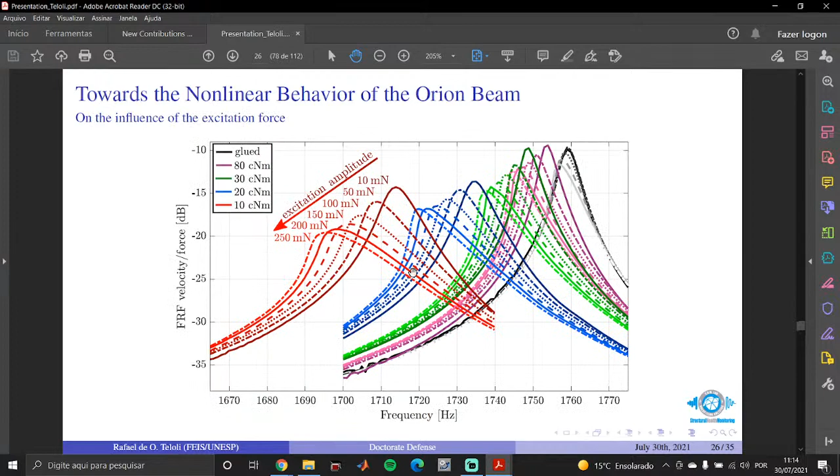In some part of your text, you mention a large clamping block associated with bonding or gluing your structure, and you also refer to our colleagues from Rio de Janeiro, Professor Sampaio and Professor Thiago Ritto, that should help you avoid major influences from your cantilevered simulated boundary condition. Do you think that would be enough, or would you consider in the future analyzing more closely your boundary conditions, how they vary along time, how the bolt's torque varies, or generally speaking, applying the same type of analysis that you applied on your joint to the boundary condition?

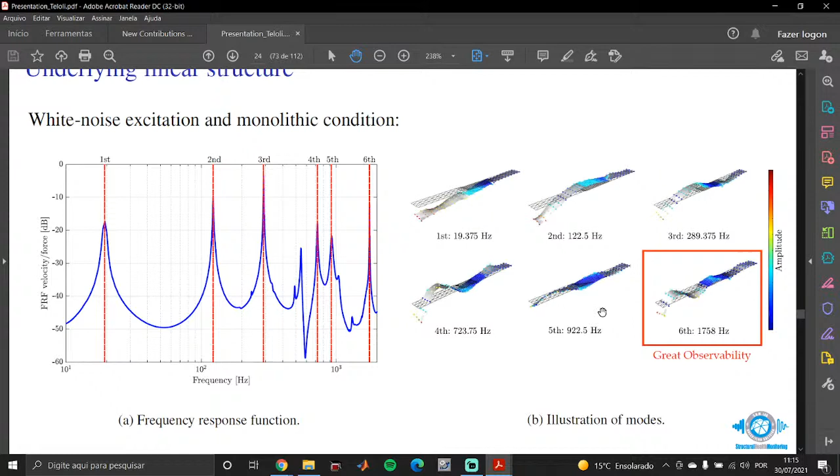Have you considered that? Yes, in fact, to avoid any kind of problems, here we have measured with a 3D vibrometer the velocity close to the clamped end, to be sure that the displacements around the clamped end are close to zero. In this condition, we could see that the displacement is in fact close to zero in this experimental application. But in the other experimental application that I showed here, we didn't perform it. So I think this could be an interesting next point for analysis.

Okay, wonderful. Just two quick final questions for you. One is a question, the other is really a suggestion. If we go back again to figure 39, I'm looking at part A of your experimental setup, and I can see that in part A and part B your joint is pretty much symmetrical with respect to the longitudinal axis of the beams.

This might sound like a silly question, but it's more of a curiosity for me. What would happen if you inverted the position of one of the bolts? On figure A, from bottom to top, you have a bolt, washer, nut. What would happen if on the right you had the opposite, alternate bolt connections? Would you expect to see different results?

No, in fact, to my opinion, the main properties related to the slip are here in the surface in contact. So, yes, I should investigate this further, but at a first comment, I think this won't influence the distribution on our surface due to the symmetry in our structure.

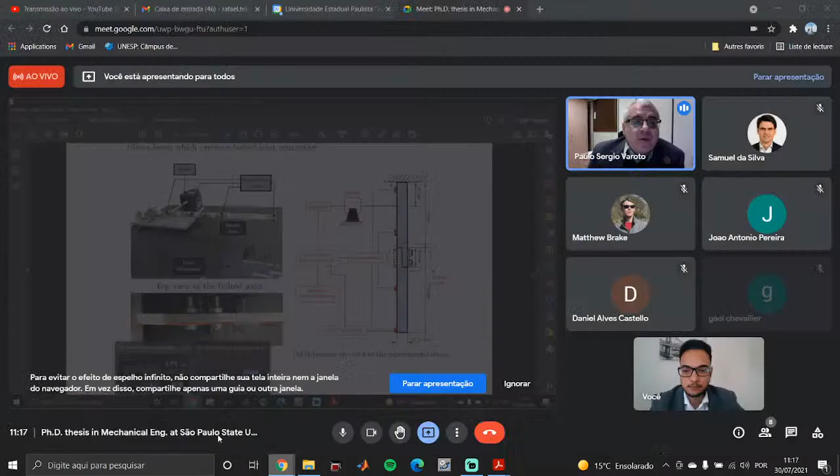Yeah, I encourage you to look at that issue in the future. If you would allow me to share my screen for two minutes, I will show you the reason for my questions very quickly.

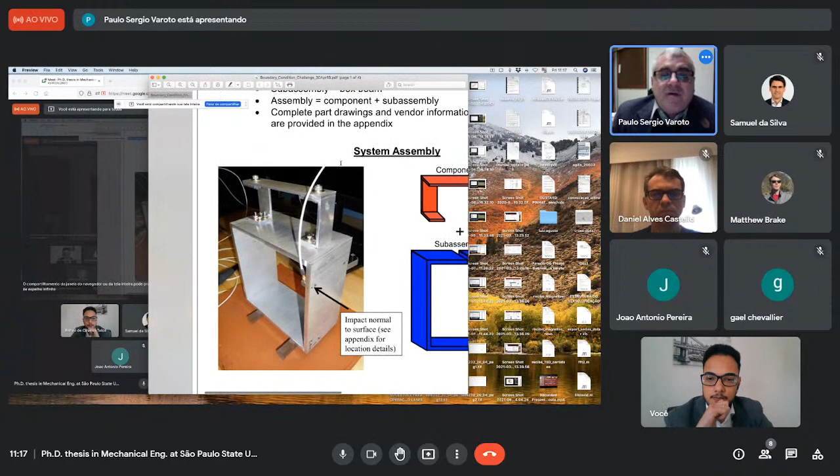The reason of my question is because we've been participating in a round robin experiment at IMAC, previous conferences, and this is what we call the BARC assembly. It's a round robin for trying to identify the modal characteristics of this type of box assembly. The guys from Sandia specifically have been in contact here, and they are suggesting that the bolted attachments would be done in alternating directions, as you can see here. So when I read your work, I immediately started thinking about that experiment we've been working on with the guys from Sandia and several other universities, and some previous preliminary results have shown that when you invert the bolt position, you have some differences in results.

So I don't know if that's because of possible torque variations, some tribological or friction effects, I don't know, but that also attracted my attention when I was reading your work, and I wanted to ask you that question. Well, maybe Professor Matthew Brake has some comment on it. Go ahead, Professor Brake, you can comment on that. I don't want to comment too much because this is Rafael's defense, not me answering questions.

But we're also working on that system. I know that a lot of the people that investigate that system glue the bolts in place, so it's rather maddening to look at most of the results you see there. But from looking at larger systems, the bolts are inert, they don't do much of anything. I suspect with the BARC, because it's such a small system, the bolts have more influence. But that's true. It's a great set of interesting questions, Paulo. I really appreciate hearing your discussion about it.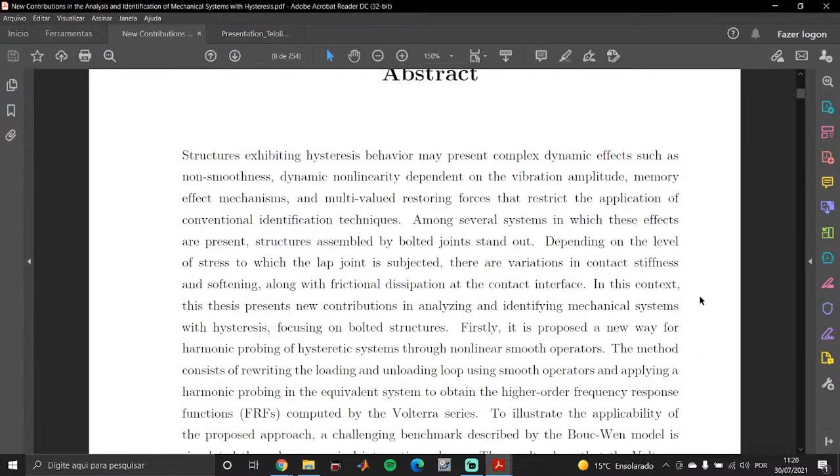Just one final remark, Rafael, before once again congratulating you on your great work, and also Samuel. I just would like to suggest, if you go back to your abstracts, either in English or in Portuguese, try to make it a little bit smaller. Try to fit it in a single page. Try to give your message to your reader in a very direct manner. It's extremely well written, I agree with everything you've done there, but abstracts are places in a thesis where you have to give your message right away, and single page abstracts are ideal in terms of describing, even though your thesis is long and you've done a lot of excellent work.

That's the only suggestion as far as format is concerned, that I'd like to leave here with you, and you will see it written on my PDF later on. But I just would like to tell you that right now. Okay, thank you for your suggestion.

Wonderful. Well, I'm very satisfied with your work. I wish you all the best in your future endeavors and your future challenges. We heard that you're going to spend some time in France. All the luck for you, all the best luck for you. And Samuel, once again, thank you enormously for giving me the opportunity to share some of your excellent work, and that will also impact our partnership and our collaboration. Thank you again and congratulations, Samuel, on this excellent supervision. Rafael, congratulations once again. Thank you very much. It was a pleasure. Thank you. Okay, Professor Varoto, thank you very much for your comments.

And now I would like to invite Professor Daniel Castello for consideration, and thank him again for accepting to participate in this jury. Thank you, Samuel, for the invitation. Thank you very much. Thank you, Gael, for the invitation, Rafael. That is a great pleasure for me to be here, being part of the jury.

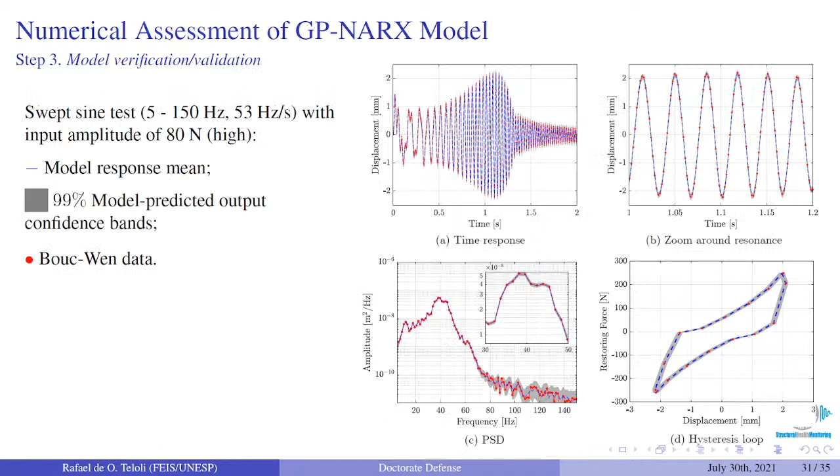Okay, this is a good point. This was the idea behind using different time signals. The idea was because when we are dealing with a black box model, generally we have problems in which the conditions we can predict the response are close to the training data considered. So in this case, we tried to propose a model as general as possible, based on the swept sine test, and then we validated it considering different signals. We considered the chirp sine and also the white noise. We have not considered different excitation signals from this one, but we will probably have problems with regard to the nonlinearity.

So if we increase the excitation amplitude, we will probably be far from the predictive capability of our model. At this point, I could say that the limit in which we can use this is related to the excitation input that we consider, which is of course closely related to the nonlinearity present in your system. So if you increase the influence of the nonlinearity, probably our model will lose its capability of prediction.

Okay, so that's important. Possibly you have written this, or possibly I have missed it in the text, but it is an important point, because as it is nonlinear, it would be interesting to define, at least to try to define, some domain of applicability of this equivalent or surrogate model.

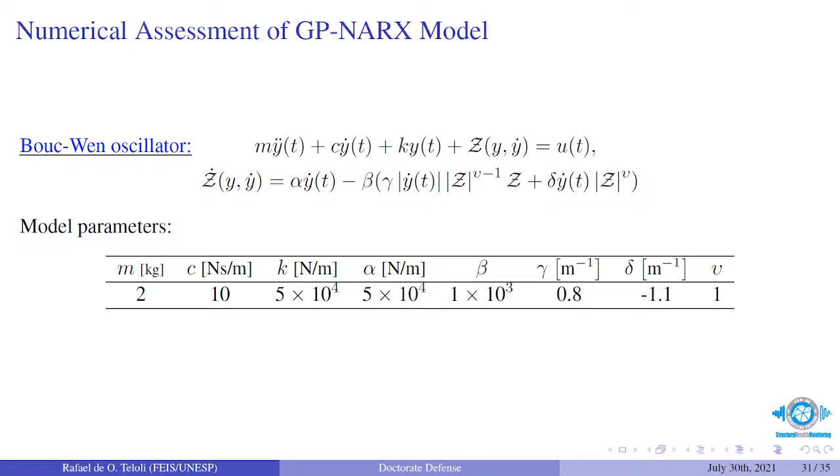Yes, I agree. This is true. In fact, all of these problems that I have worked are based on global analysis, considering isolated vibrating modes. So the limitation of the methodologies that I proposed is dealing with isolated nonlinear modes. This is the first limitation. Of course, we can expand the applications from this work to multiple degrees of freedom systems. But our main limitation is related to this, and also to the degree of nonlinearity.

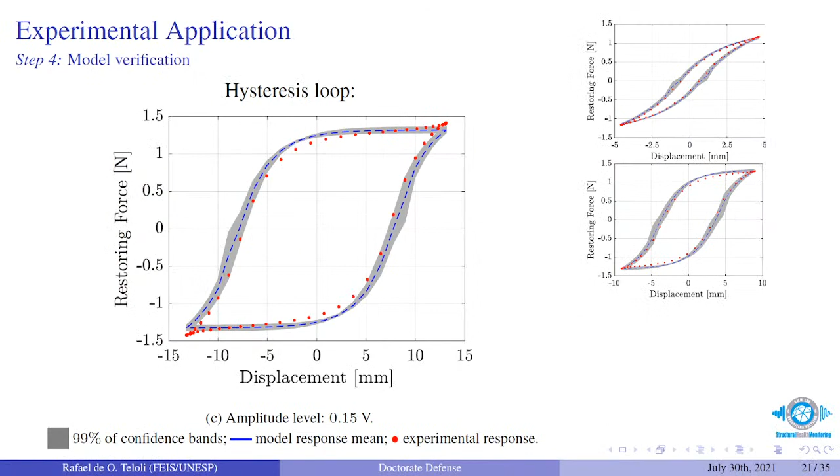I have just one more question. When you performed your calibration using frequency data, how did you define the variance of the measured data that you use on your likelihood functions? I have considered the variance on the entire response, computed with regard to these different experimental measurements, and from that I have proposed the initial value for the covariance to be used in our likelihood function.

Okay, that's perfect. So you have, I don't know how many measurements for the frequency response function, but after collection, 5? Yes, in this case it was 5. So you can sweep each frequency, obtain the mean value and a variance, and from this set of variances, choose a reasonable value for the variance of the experimental data. Yes, that's perfect, that's okay for me.

Rafael, I don't think I have many more questions. I have only one more. Could you put up your slide 29, please? Yes, of course, that is only a curiosity. 29, here it is, oh sorry, I have a lot of slides.

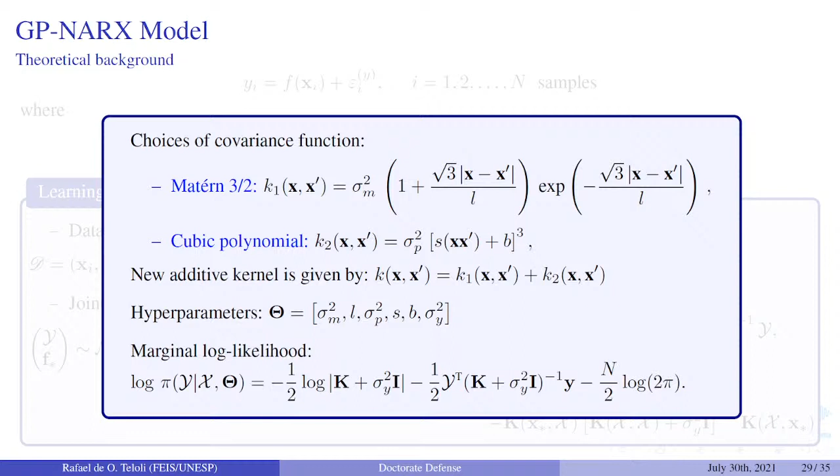29, yes, this one. I have only one question, maybe two, but when you write the choices for the covariance function, Matérn 3/2, when you choose that covariance, it seems to be something like this, or no? Something like two peaks, or no? I'm not sure, wait, no, it's just a curiosity, because it is the... oh sorry, let me turn it off.

It is a curiosity because, for example, when you use Matern, you are telling me you have a parameter to measure the magnitude of the variance, sigma m squared, and you have the product of two functions. The function that is the exponential is maximum when x and x prime are equal. But when you take a look at the other function, which has this 1 plus square root of 3, the minimum value is when x is equal to x prime. Is it okay?

To be honest, in this case, the covariance functions were already implemented in the software we used to identify the model. Of course, we could select many different kinds of covariance functions. The selection was performed based on the covariance functions that promoted the best results. To answer at this point, I don't think I have the best way to explain the relations here, but I'll investigate it further.

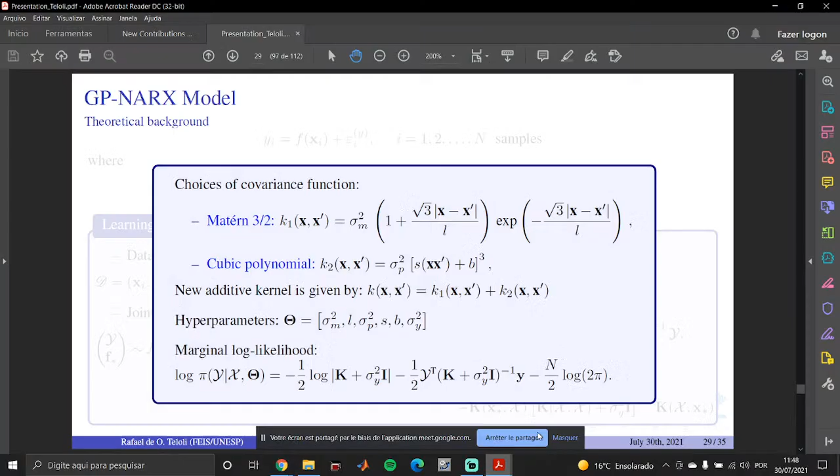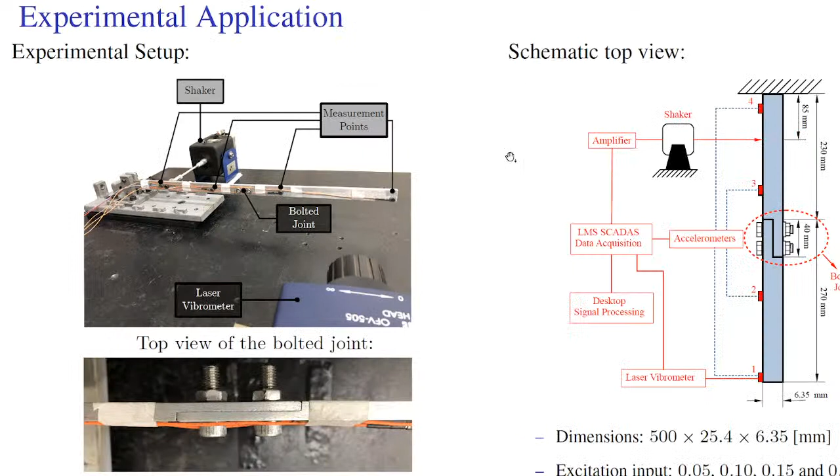I posted something here, okay, it's mostly already discussed. It's something I had wanted to ask you, but Professor Paulo Varoto already did. But put up slide 18. Here it is, 18. Here. Yes. The other, it's the same slide, but the other figure. Okay, the one below. Oh okay.

Okay, it's more out of curiosity because I saw your beam, it's a slender beam, and I was thinking about the assembly. I would like to ask you, did you just put two bolts like this for a continuous beam, without the connection, and excite this structure? Because it's not a robust structure - could you identify some non-linearity of the system, since the level of the force is large? I suppose you found some non-linearity in this system. Did you make some tests in this way?

No, in fact in the bolt joints community it is very common to test the beams in the monolithic condition. The results I have shown in the Orion beam, we considered the monolithic conditions to estimate the frequency response functions, but in this case we have not considered this. This was the first experimental application we investigated. In this specific case, I don't know if we will see the nonlinearities, because if so, the response is supposed to be combined with the nonlinearity from the softening effect.

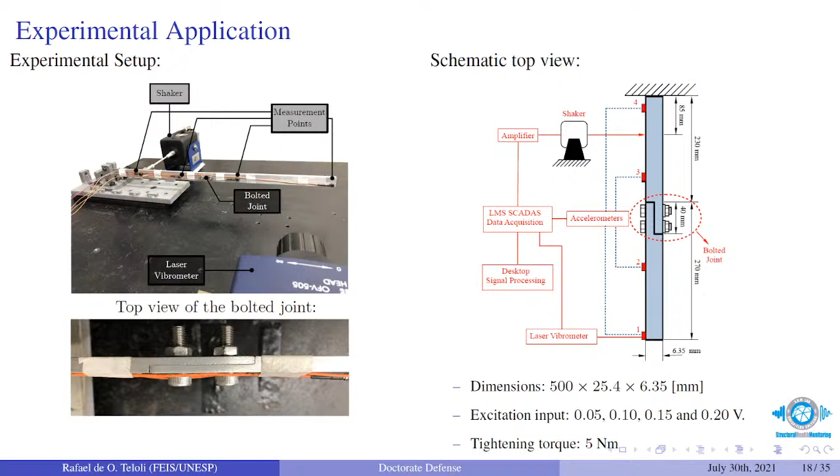I was a little curious to see, in a continuous beam, the effect of the size of the bolts. I think it has some influence, like a concentrated mass for this kind of beam. For instance, if you consider even the Orion beam, and this could be interesting for the discussion, we see the nonlinear behavior of the Orion beam even in the glue condition, when we have the contact patches glued. We can see that here we have the presence of nonlinearities.

However, when we compare the nonlinear behavior present in these curves with the nonlinear behavior of the other curves, and also considering the frequency interval we are dealing with here, it is supposed that at this location we could predict the behavior of this condition using, for instance, a linear model. Of course, here we have some changes, but they are not pronounced, just slight. So in this case, probably a linear model could fit well the behavior of our structure. Of course, we will probably see similar behavior in that structure, but the nonlinearity comes from the presence of the joint. Okay, thank you.

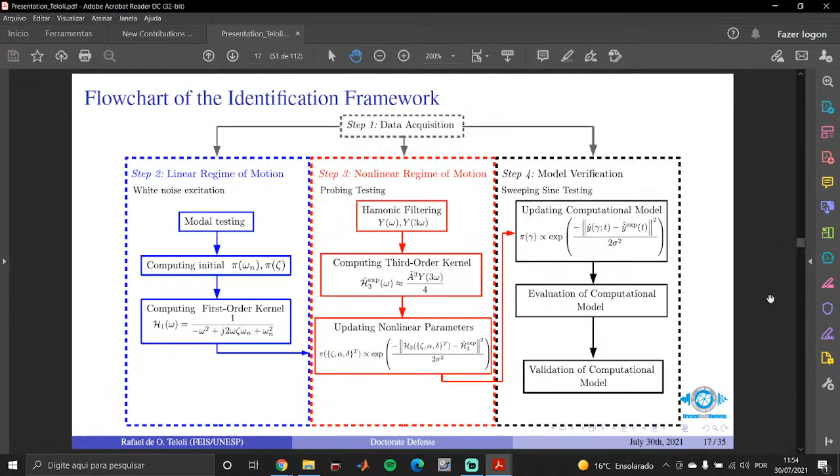Another thing I'm curious about, because I suppose your work is good work and someone will try to reproduce and use this work to reproduce or also apply it: how did you define the initial parameters? You just put one table there, and I didn't see - I don't know if I missed some comments - how did you start with those parameters?

Okay, so at the beginning, to update these parameters, we must select a prior distribution. The interval we selected for the prior distribution was based on sequential quadratic programming optimization that we performed on the Bouc-Wen model. We have some conditions we must consider, maybe here in the text I could explain it better, but we have an interval of parameters that we have proposed. Let me just find this... here it is. So to define this, I have minimized this function based on the sequential quadratic program.

We have these conditions here, in which we must consider that the parameter alpha must be inferior to our resonance frequency. So we have some conditions based on the physical behavior of our structure. After analyzing the behavior, we also know that softening behavior is present in the system response. Thus, we also have conditions to ensure that the Bouc-Wen model will reproduce the softening effect on our system. This was based on changing some conditions for our first problem, in which we have defined the prior distribution.

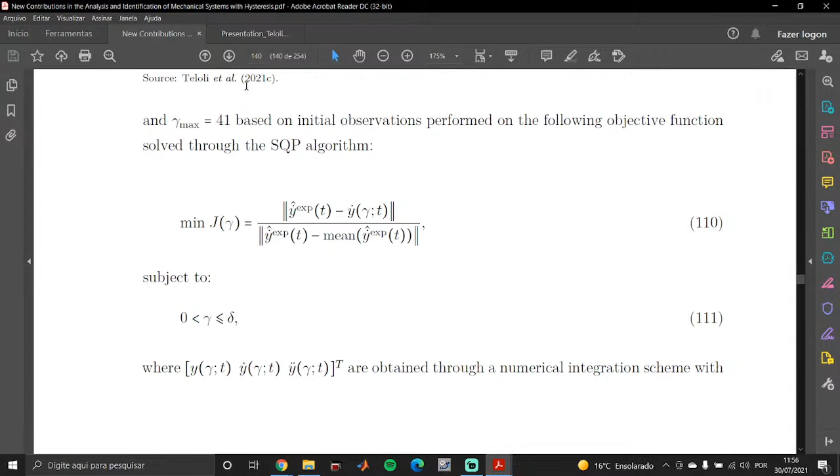Just one more comment, and I would like to hear from you: do you think you can use this same approach for a real structure, not just a laboratory structure? What do you think about that?

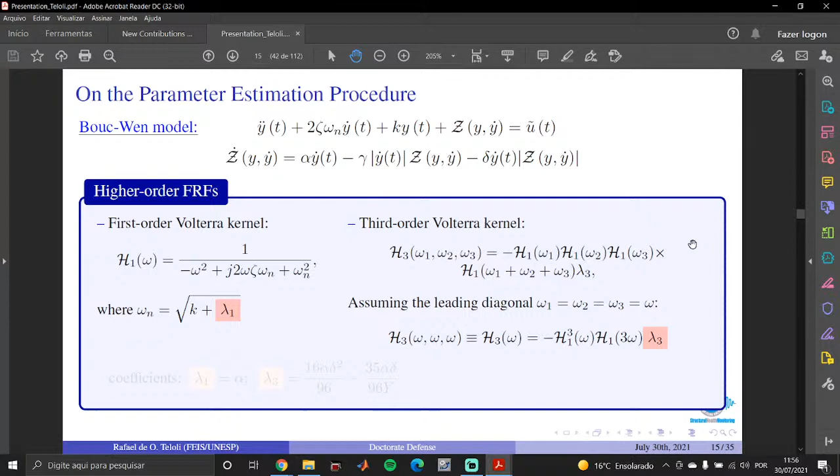So at first, with regard to the Volterra series representation, we have more limitations on it. The first one is that we must consider that the hysteresis loop is almost closed. In this case, we have dealt with a condition in which it was easy to confirm that this condition was satisfied.

For instance, applying this to a multi-degrees of freedom experimental or industrial scale case, at the beginning I think we will have some limitations. Maybe we can propose a different way to update the Volterra kernels, for instance by approximating, instead of using frequency response functions, the time representation of these functions to perform an analysis directly on the time domain response to update these parameters. But at the beginning, yes, I think we have some limitations, especially because we must satisfy this condition, that the behavior of our system lies in the weakly hysteretic regime.

My question is because most real structures, the condition of weakly damping and weakly hysteretic behavior is not verified. Anyway, it's okay for me.